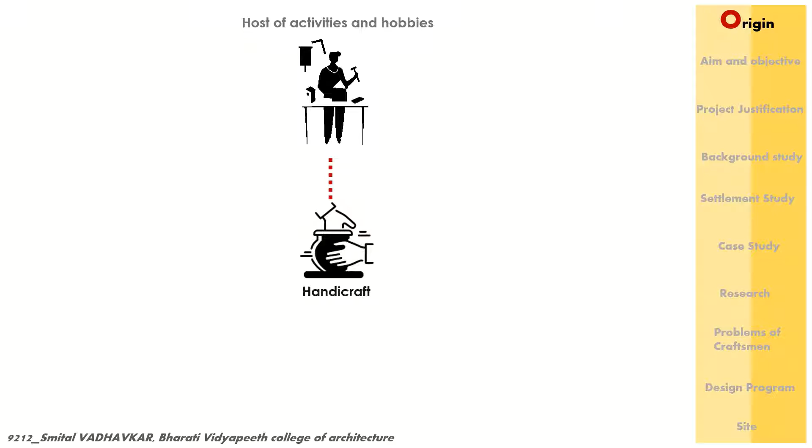The interest in this topic arose when I helped my senior in her project regarding craft. So what is craft? Craft is a host of activities and hobbies related to making objects and products with one's own hand skills. This could also be known as handicraft. It was seen that craftsmen enjoy the joy and excellence of their own work. This was also known as craft because a group of people or family had refined their skills professionally into it.

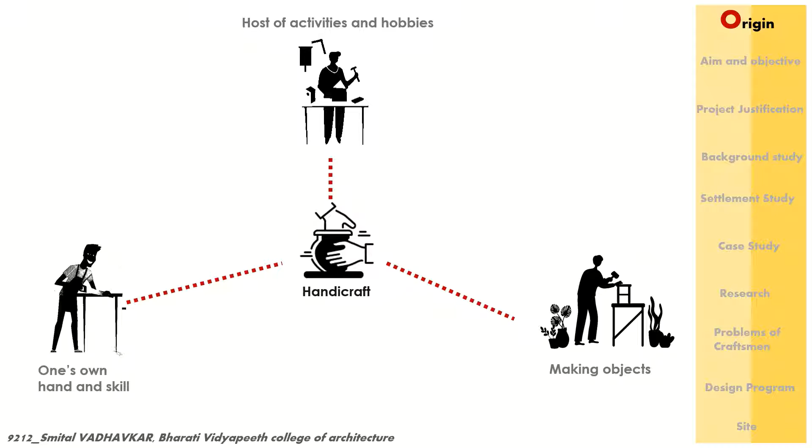So why did the craft decline? Did the Industrial Revolution and increase in machines reduce the role of professional craft gradually, as machines produced the same product in industries at a lower price? And now we commonly see this craft as a hobby.

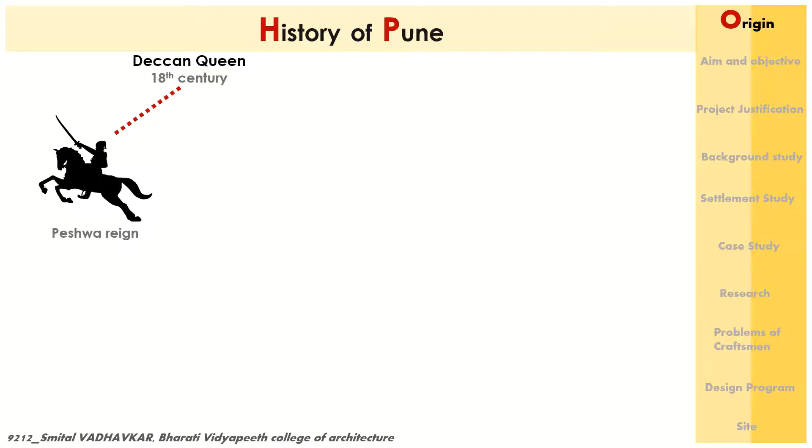This development was initiated in the center of the city, that is Kasba Peth. During the reign of Peshwa in 1730, they invited people from different parts of India who were professional and skillful to start their business and profession in the capital city, like Tambat, Kumbhar, and Burud. So these people worked together, lived together in the streets, which were known as Ali at that time.

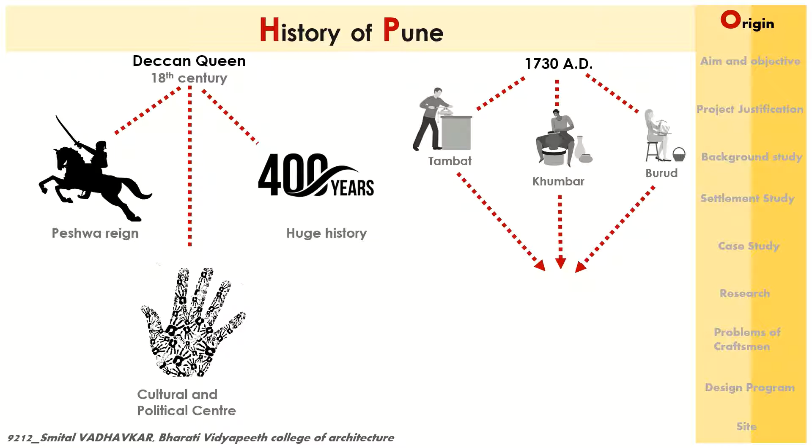So the Ali is a lane of the street in which people of the same profession work together as a community, like Kumbhar Ali, Tambat Ali, Burud Ali, Tambaku Ali, Bandhar Ali. The different Alis are Tambaku Ali, Stationary Ali, and Bandhar Ali.

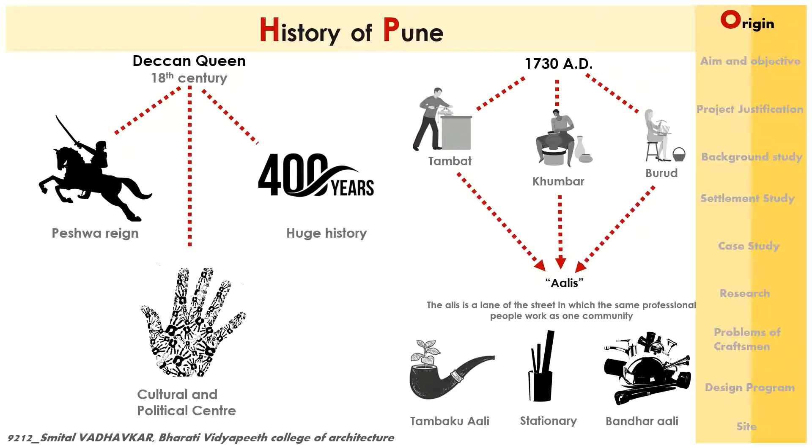The trade of these craftsmen was in great amount during that period, but with modern technology or modernization, few crafts could survive. Craftsmen like Tambat, Kumbhar, and Burud could barely survive.

The project focused on understanding how architecture can create a co-working space to resolve the problems of craftsmen of Pune city, and also to enhance its trade by producing more products using new methods and training local people.

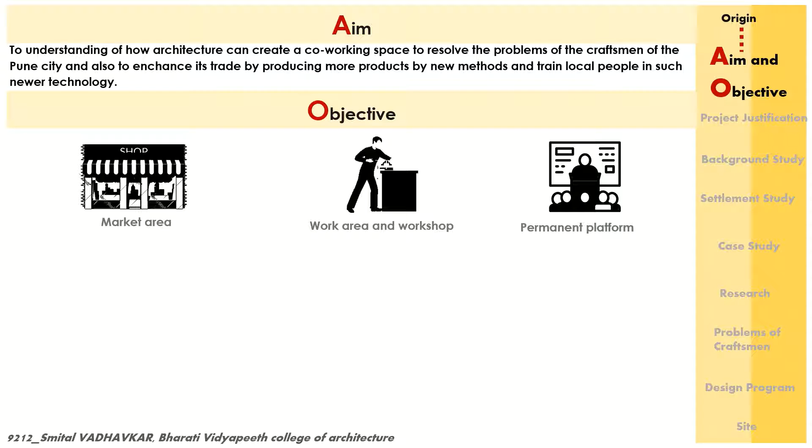The objective of the project is to have a market area which could promote tourism, to provide work area for the craftsmen, to organize workshops for craftsmen where they could live and learn new modern products which are in demand, a place where young craftsmen could learn. Introducing skills for the craftsmen in a sustainable manner could create a permanent platform for them, and also help promote these old craftsmen of Pune to various parts of India.

To produce, trade, and have a professional workshop would be the primary scope of the project, and these are the limitations. Why is this project necessary?

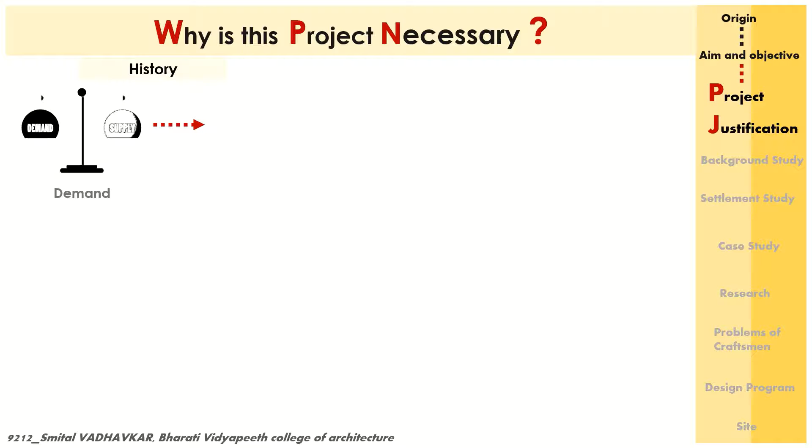As we see in history, the demand for this craftsmanship was more, but nowadays, due to modernization and urbanization, people neglect this old genuine product. Still, few families are dependent on this art. The NGO INTACH Pune always tries to make this art known to all.

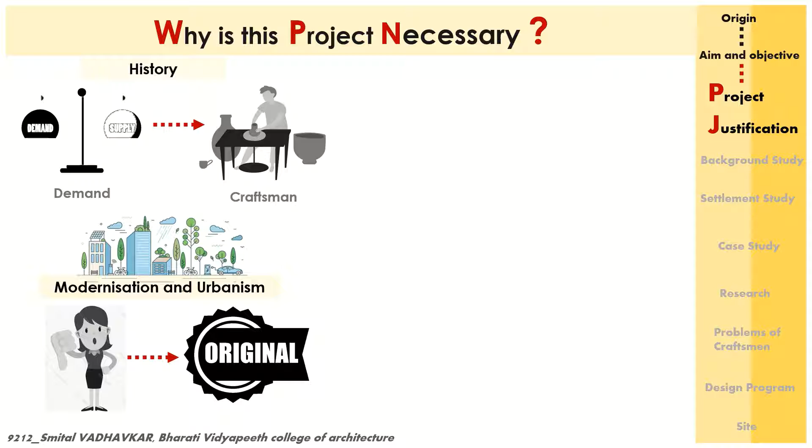The problem faced by the craftsman is the space problem, the problem for selling the products. Facilities such as toilet blocks are not provided. Few craftsmen do not have space to sell, so they sit along the roadside and sell the products.

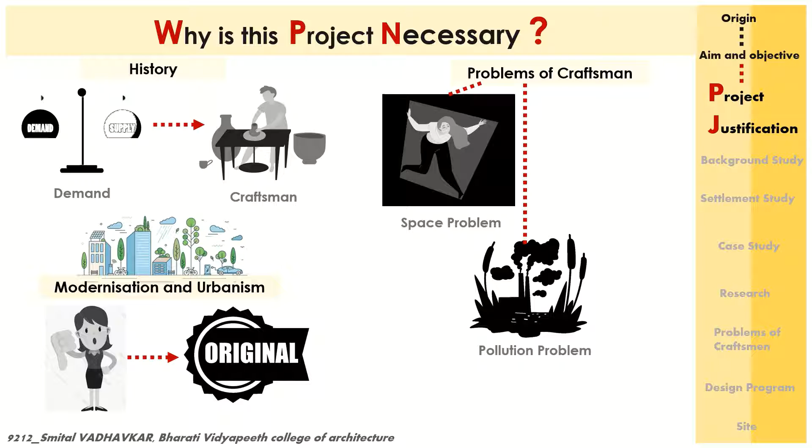The second problem is the pollution problem. The burning of kiln and the firing process in Tambat and Kumbhar creates a lot of pollution.

The third is a transportation problem. These craftsmen have been shifted from the center of the city to the outskirts, so they prepare their product in the outskirts and bring them back to the center. This causes a transportation problem and a traffic issue for them.

So there is a need to revitalize these craftsmen, allowing them to work in a mixed environment while making the product. Today the machine has a lot more importance, which cannot be denied. But it is also important to know that the revitalization of this craft is important too, without changing their method, which is traditional, skillful, and old.

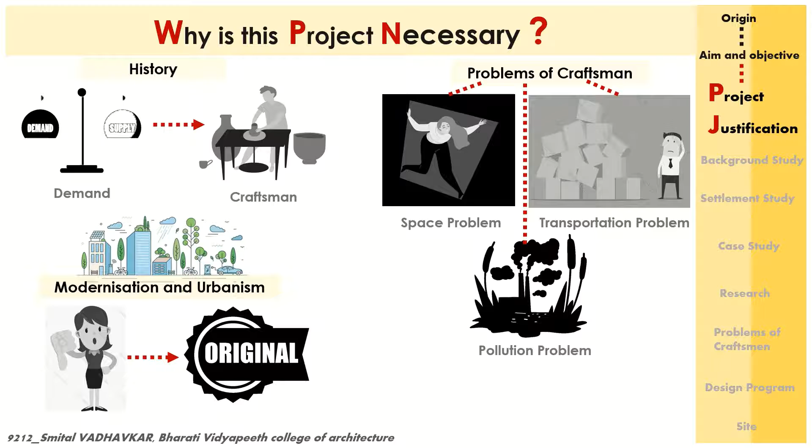But to utilize their potential to work and teach them new ways to make products, and recreate old products in a newer way which could be accepted by society. This could also help them increase their income and help the Indian economy. Mainly this will help preserve the craft which is the core of the city.

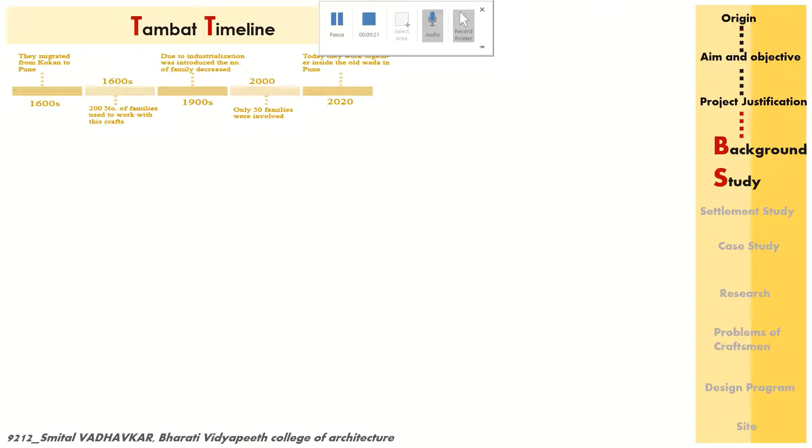So moving towards understanding the three crafts, the first one is Tambat. It is seen that these people were invited from Konkan to Pune in 1600, and now the number of families has reduced to 50 families, and they now work in Old Wada in Pune, or some people work individually. The process of Tambat Ali is seen in the images.

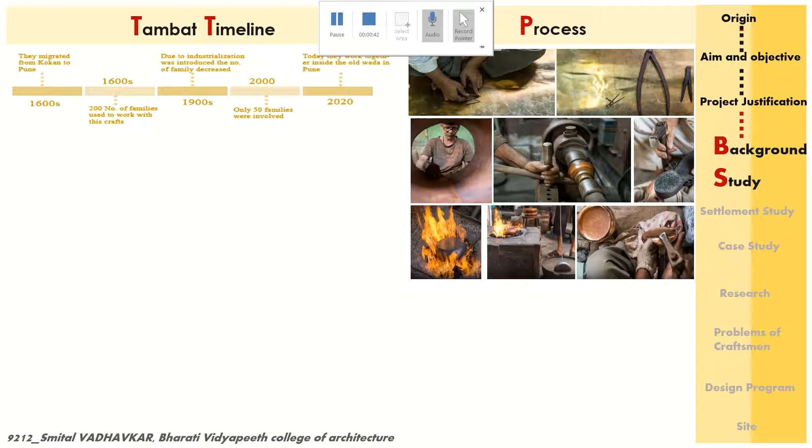So this is the copper sheet. They cut it along and join it. This is a machine used to make the shape of the product. Then comes the firing process, and at the end is the embossing and buffing process. These are a few final products of the Tambat craftsman.

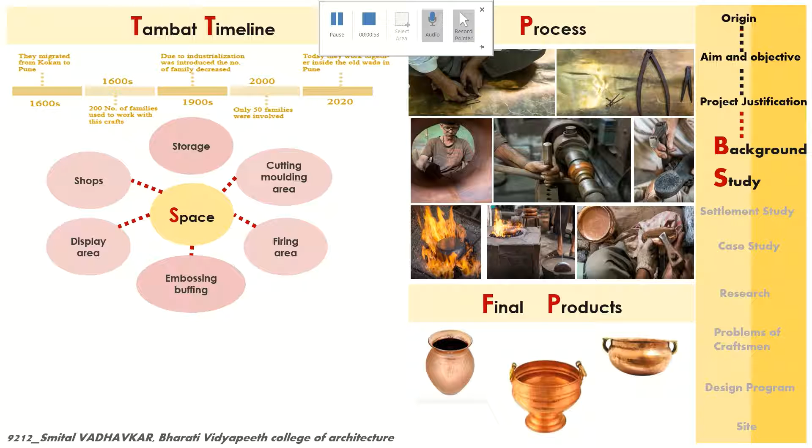After understanding the process, the spaces were listed down, which could be designed, and the area for it was designed as per the function and the area requirement for the person.

The next is the Kumbhar. They were called from Gujarat to Pune in 1800, and the number of families at that time were 200. Now they are almost 20 to 25 families, and they work in Mundwa, which is at the outskirts of Pune. The process of Kumbhar craft is seen in the images.

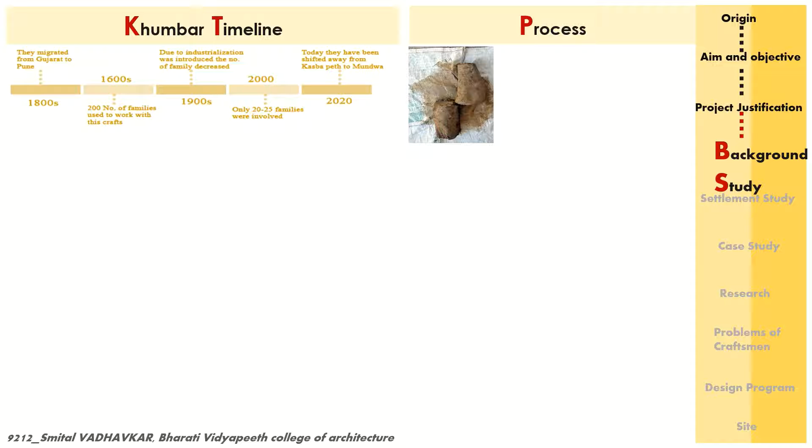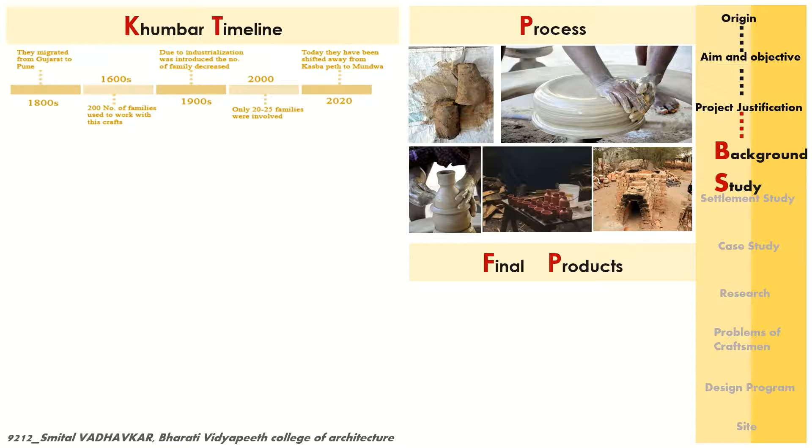The steps of making pottery involve soil preparation and wedging, then molding it on the potter wheels, drying it, putting it in the kiln, and then decorating it. These are a few final products of the Kumbhar craftsman.

After understanding the processes, the spaces were listed down which could be used to design, and the area for it was designed as per the function and the requirement of the person.

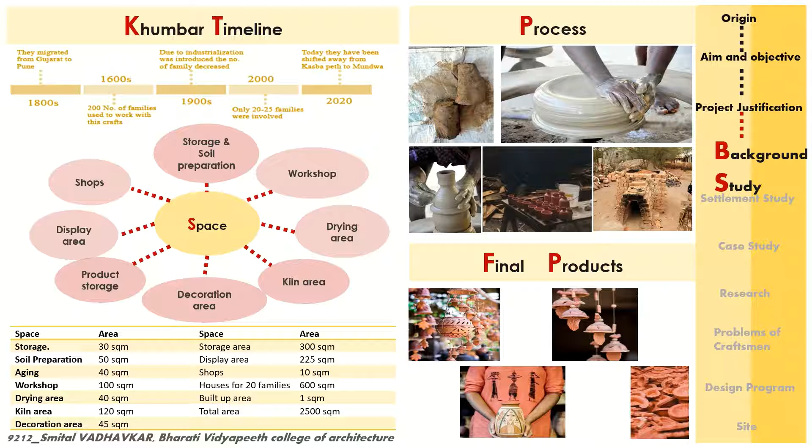The last is the Burud Ali. They were called from Junnar to Pune in the 1800s. Now there are almost 15 to 20 families working in the Ganesh Peth. The process is shown in the images.

These are a few final products of Burud craftsmen. After understanding the processes, the spaces were listed down which could be designed, and the area for it was designed as per the function and area requirement.

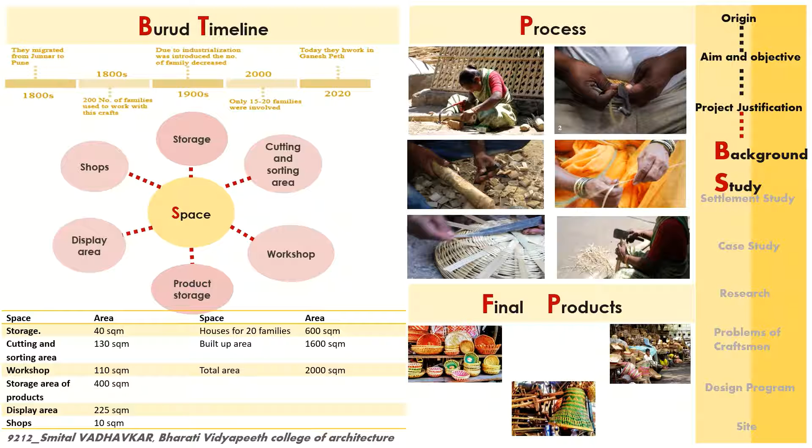Next comes the settlement study. Four settlements were studied. The first one is Indonesia pottery, the Klipoh village in Indonesia, and the learning outcome was that the village has good interaction between craftsmen, tourists, and traders. It was observed that the spaces used could serve as a common space for the pottery, for example, the kiln is common for 6-7 families. This could reduce pollution also.

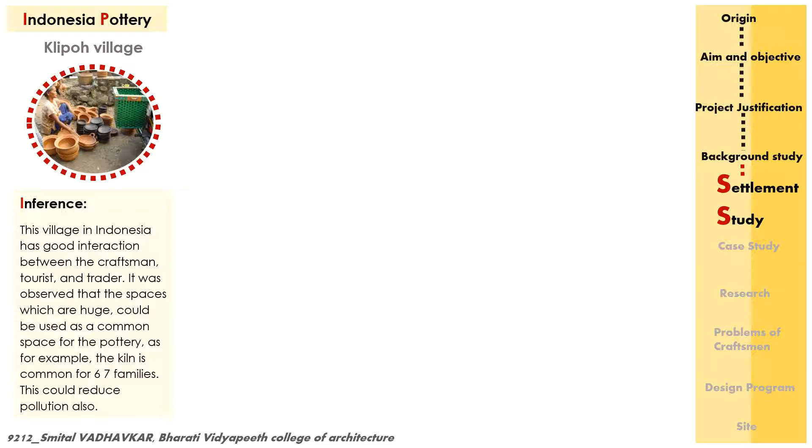The second one is the Dharavi pottery, which is very famous in Mumbai. Here the spaces were small, and this caused many problems, as the kiln was just behind the houses, which caused breathing problems for the people residing there. No proper space was given for workshop and living.

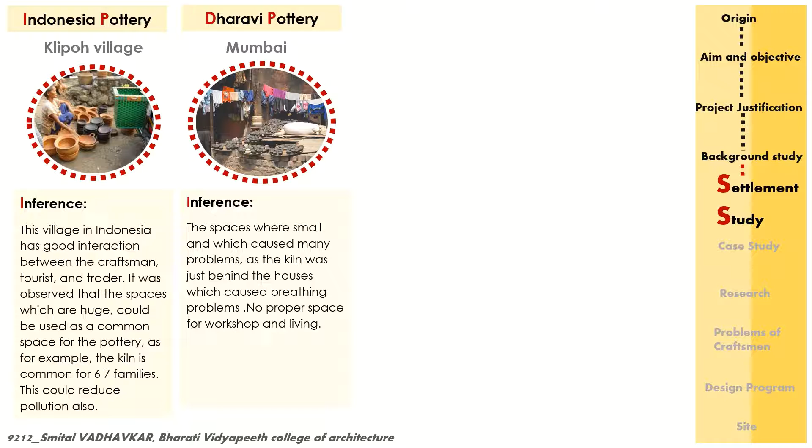The third one is the Tambat Ali of Pune, which shows that people work in groups as well as individually. They have workshops in front of their houses and also in the Vada. The condition of working is not so good. During the rainy season, it is difficult for them to work, and they don't have proper space as per their work.

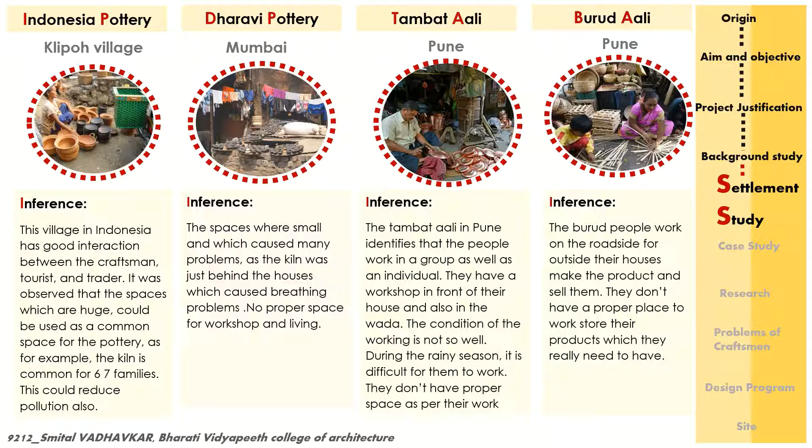The fourth one is the Burud Ali in Pune, where people work on the roadside outside their houses, make their products and sell them. They don't have proper spaces to work or store their products, which they really need to have.

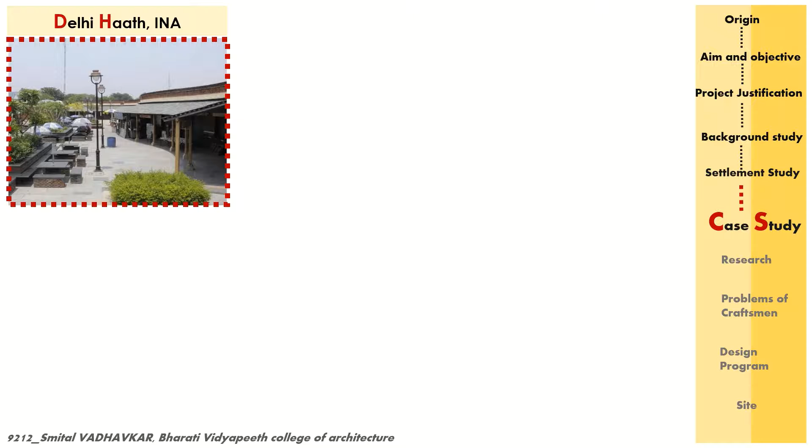The case study Delhi Haat INA is situated in INA, Delhi, and is designed by Pradeep Sachdev, in which the architect has used different materials to distinguish different paths for the walkways, shopping lanes, and pathways.

There is also a colonnade veranda created which is used by tourists to look into the shops and choose the product or overview it. The design flow is such that it maintains the admin at the entrance to control the tourists, and then the shops, as people could walk the whole side, so the cafe is placed at the end.

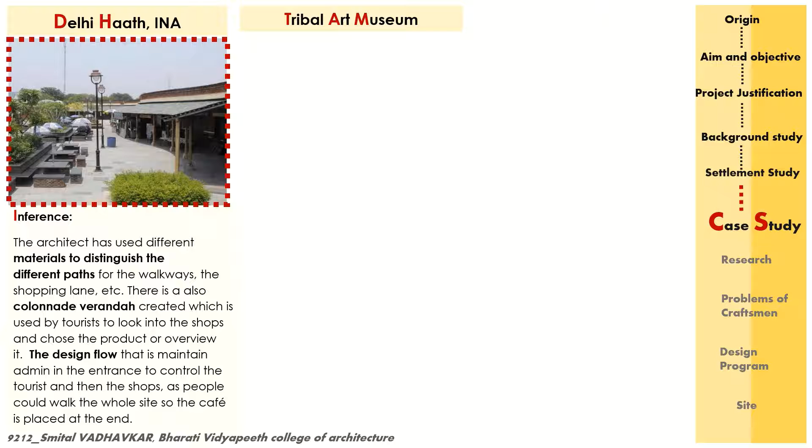The second is a Tribal Art Museum situated in Bhopal, designed by architect Revathi Kamath. It is a very good experiential structure which makes you understand the life of tribal people through the spaces. The concept of geometry is well seen in the plan. The architect used local material to express the tribal living of the artisans. Through the structure, it is seen that it is beautifully designed in a vernacular way.

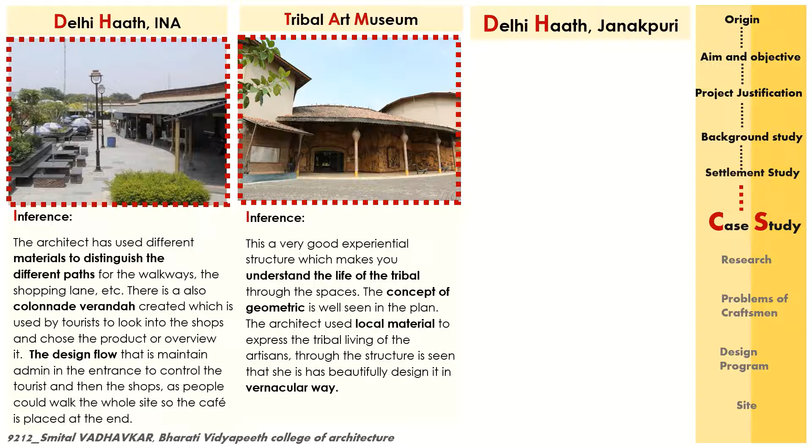The third one is Delhi Haat Janakpuri, situated in Janakpuri, Delhi, designed by the Archohm firm. Here the architect has beautifully used local materials in a contemporary way. The pathways are so gracefully designed that the user won't get interrupted.

The use of light is seen in some areas through the slab. A number of ramps were provided to go to the different levels. Proper design of green space was done wherever required.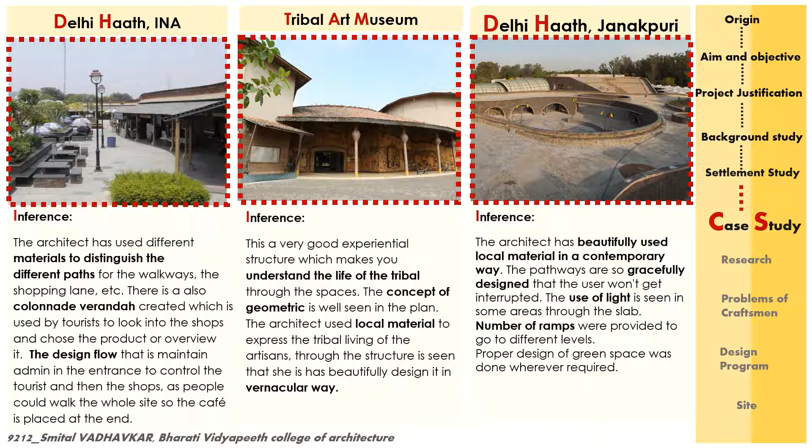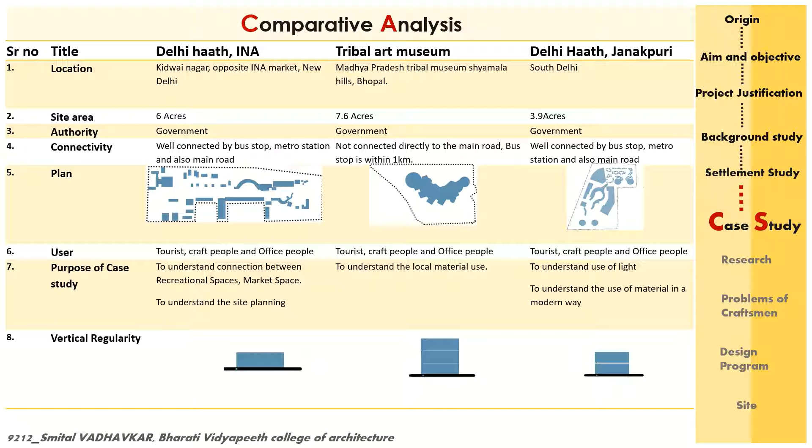Comparative analysis. In this, the points which were understood were location, site area, authority, connectivity, plan, user, purpose of case study, vertical regularity, types of spaces, planning, construction materials, and inferences.

The research focused on understanding construction material, with bamboo and mud, and how to apply it in design and how it could help the environment.

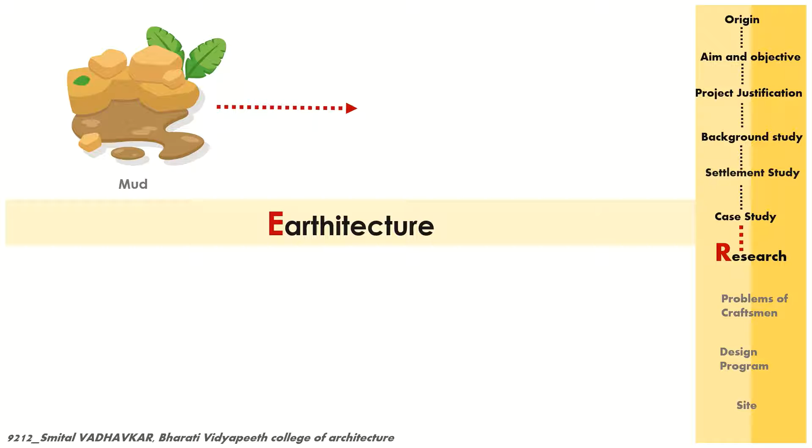The objective is to understand mud as a brick, as rammed earth, mud with straw bale, compressed earth blocks, and wattle and daub. And for bamboo, it is understood as bamboo reinforced concrete, roofing material, and walling system.

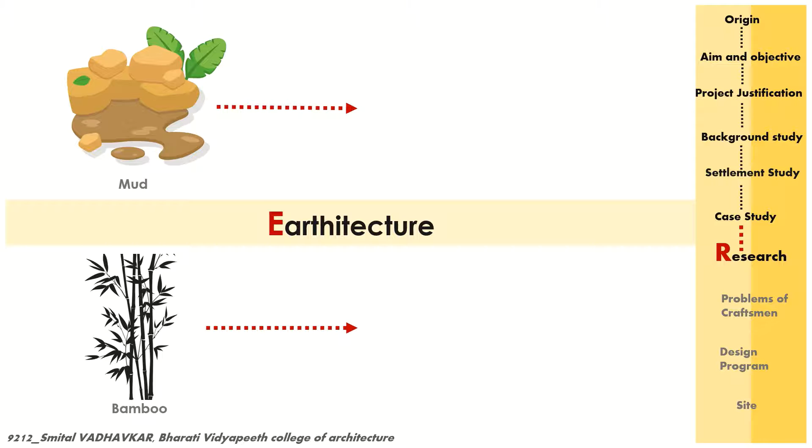As we see, the mud could be used and reused again once it is scrap of the brick, it could then go back to earth.

And these are a few advantages of bamboo. It has high tensile strength, fire resistance, good elasticity, the weight of the bamboo is less, and it is cost effective.

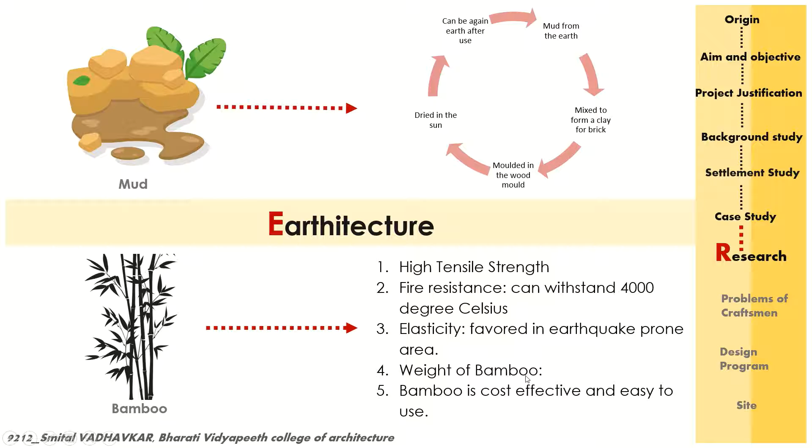Understanding mud as a material. The first type is mud as sun-dried bricks. In the first image, it is seen that the mortar is the same mix as the brick, but in a muddy state. The size of the brick is determined by molds used, which are made of wood or metal.

The second type is rammed earth. This shows the steps of how rammed earth construction is done.

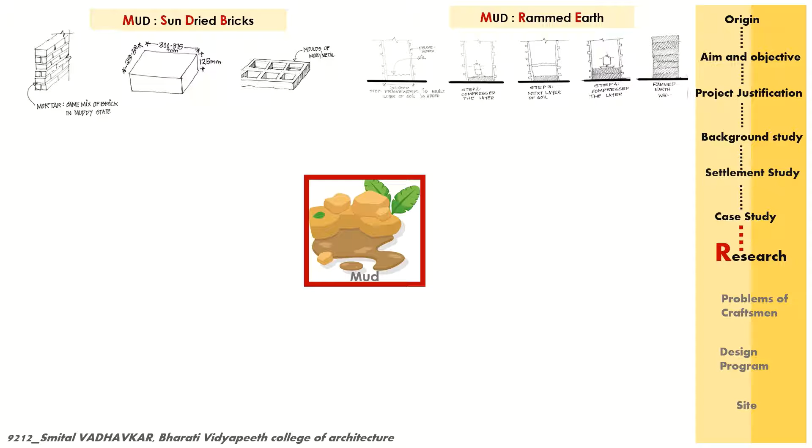The third type is mud with straw bale. The straw bale is the tubular stalk of grass such as wheat or rice, which has high tensile strength. Hay is different from the straw used here. Rice grass is significant in silica content, is dense, and can resist decomposition.

The fourth type is mud as wattle and daub. It has a framing of bamboo, and then the mud is plastered over it.

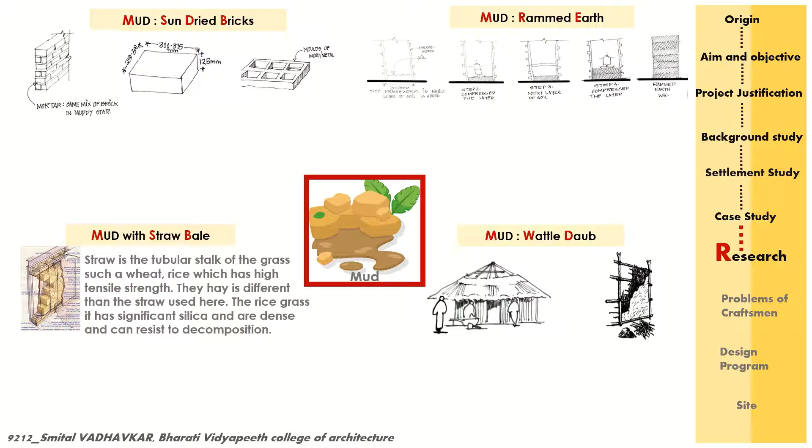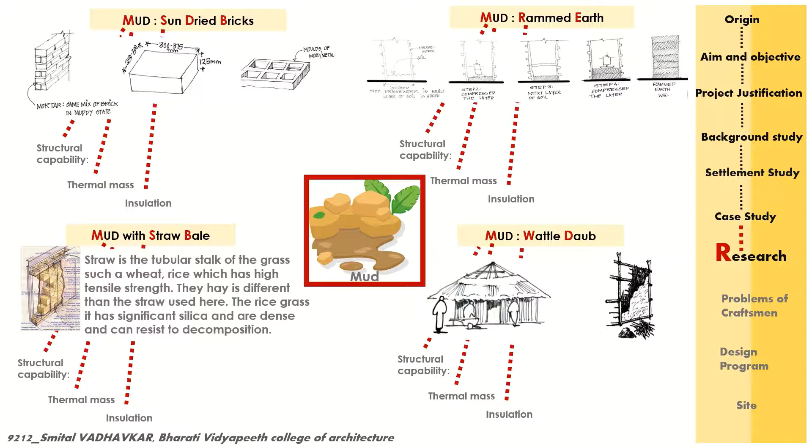After this, the study of all properties such as structural capability, thermal mass, insulation, fire resistance, durability, environmental impact, and embodied energy of all the materials has been studied.

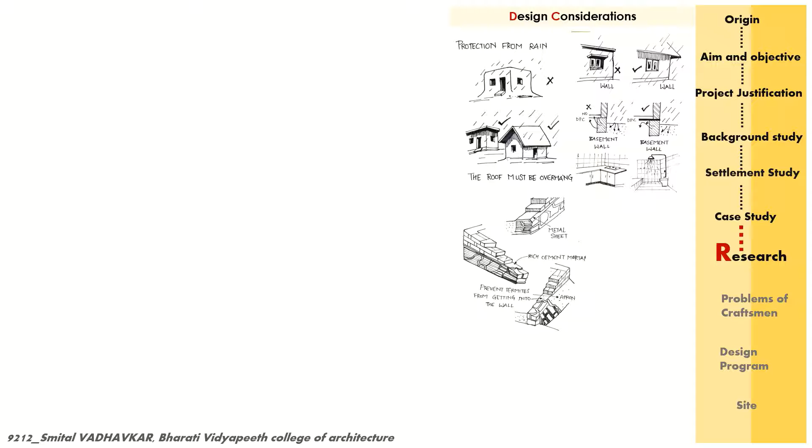After understanding the material, these are the design considerations taken care of: there must be overhangs, the exterior walls should not come in direct contact with rain, and the foundation should be protected from rain.

The table explains the characteristics studied and how the design could respond to the climate. The pointers studied were wall thickness, structural system, structural capability, thermal mass, insulation, fire resistance, embodied energy, and the suitable climate for construction.

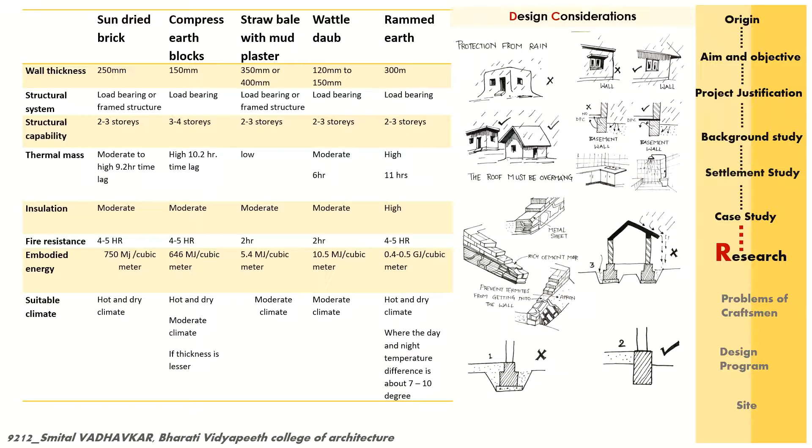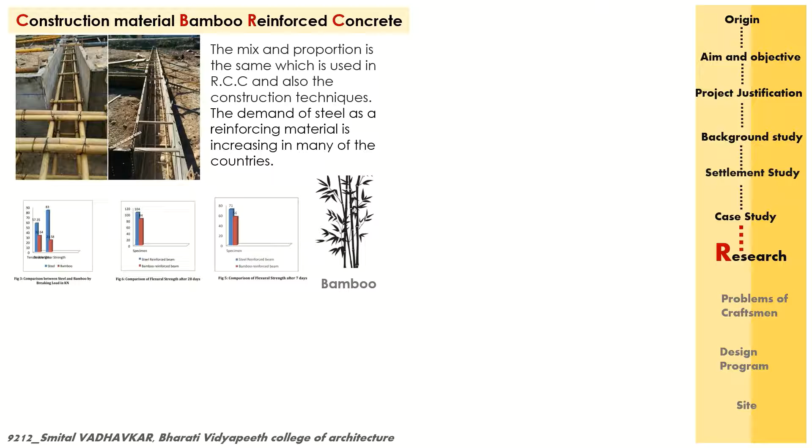The second material is bamboo, used as reinforcement in concrete. The mix and proportion are the same as used in RCC, and the construction techniques are also the same. After understanding the properties of bamboo, it is seen that bamboo reinforced concrete deflects due to low density, but the flexural strength is almost the same as steel reinforced concrete. Hence, it would be used where the load is less.

Using bamboo reinforced concrete would also reduce the cost and the environmental effect. There are a few walling systems using bamboo: the woven bamboo wall, whole bamboo wall, vertical halved culms, and the wattle and daub method.

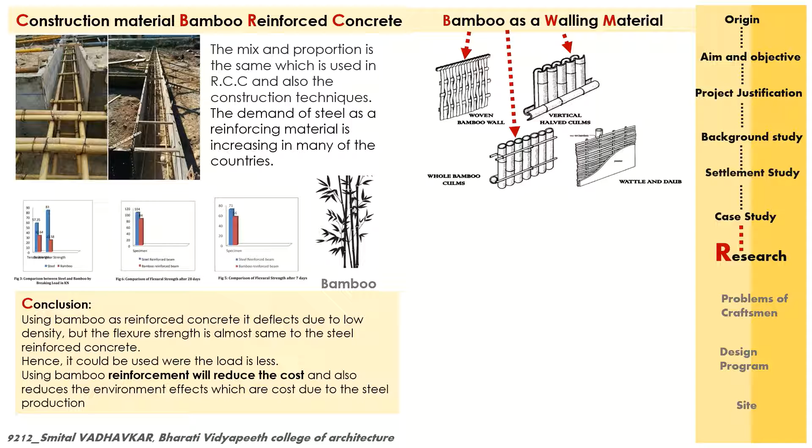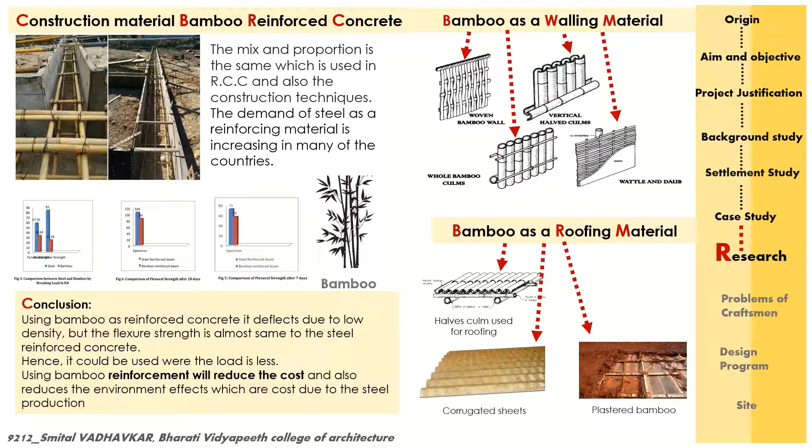Next is the roofing system using bamboo as a material. The first is halved culms used for roofing, corrugated sheets used for roofing, plastered bamboo, and the last one is a mat of bamboo for roofing.

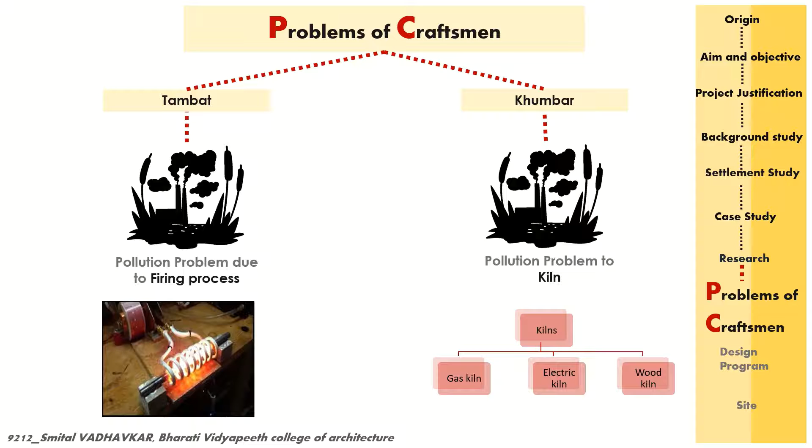Next, the research focuses on understanding the problems faced by craftsmen in their processes and introducing new technology. The main problem of the Tambat community is the firing process, which causes pollution. A copper coil for heating the vessels could be used instead, reducing pollution and replacing the firing process. The problem faced by the Khumbar is the kiln, which causes pollution, and it could be replaced by a gas or electrical kiln, which also saves time and reduces pollution.

Design program: the project will not only promote the craftsmen but also connect tourists with craftsmen. The tourist would experience the craft by living in the village. The project will consist of three main parts.

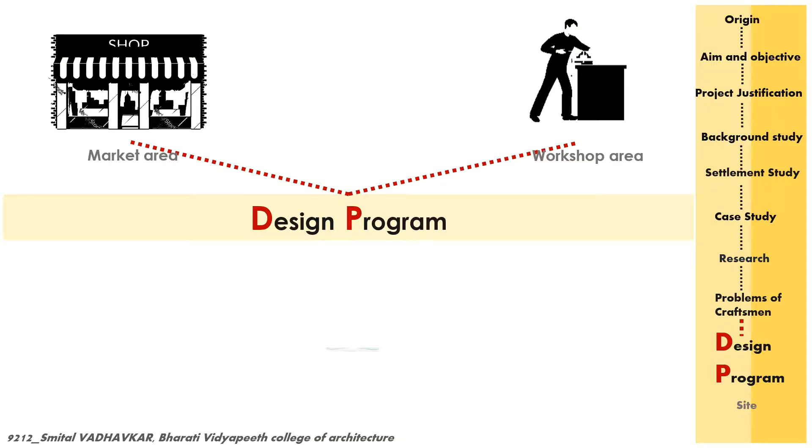The first part is the market area, the second is a workshop for craftsmen, and the third is tourist-attracting spaces such as cafes, green spaces, and shops. This is the area program developed after the case study and understanding of the craft.

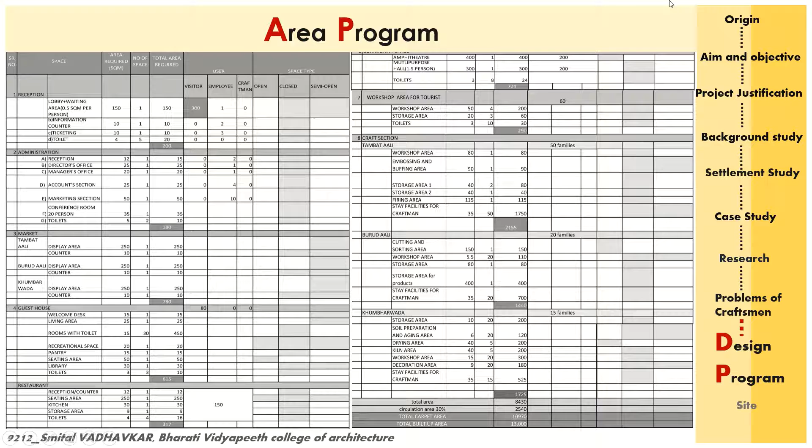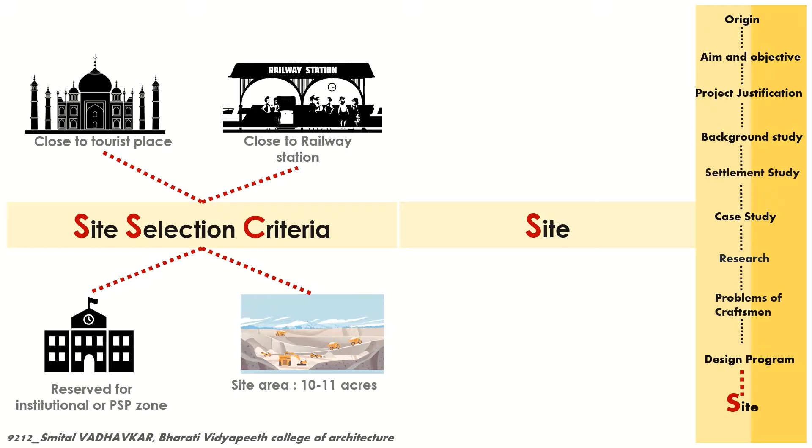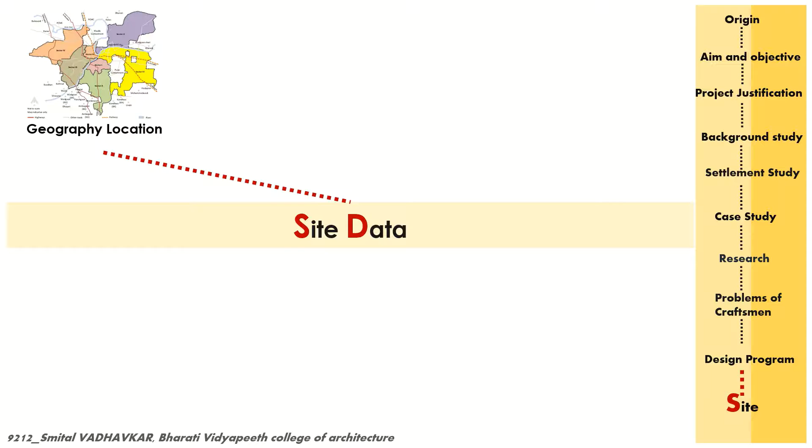The site data: the neighboring districts of Pune are Raigad, Satara, Solapur, Thane, and Ahmednagar. It is situated in the Deccan Plateau, 560 meters above sea level. The Mula Mutha is a major drain, and the city has underground sewer lines.

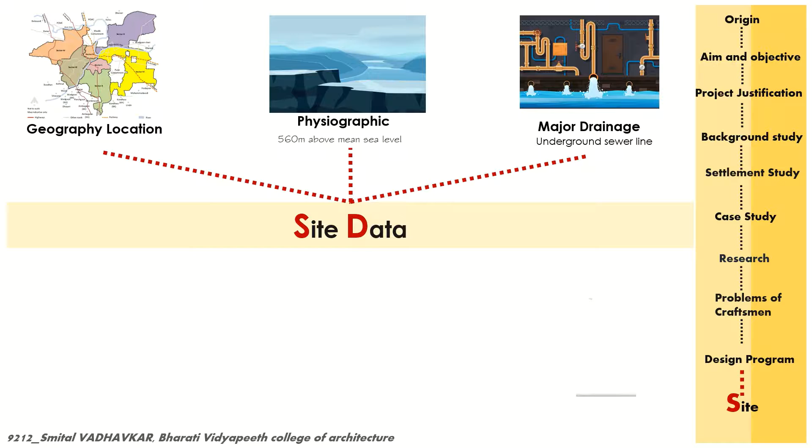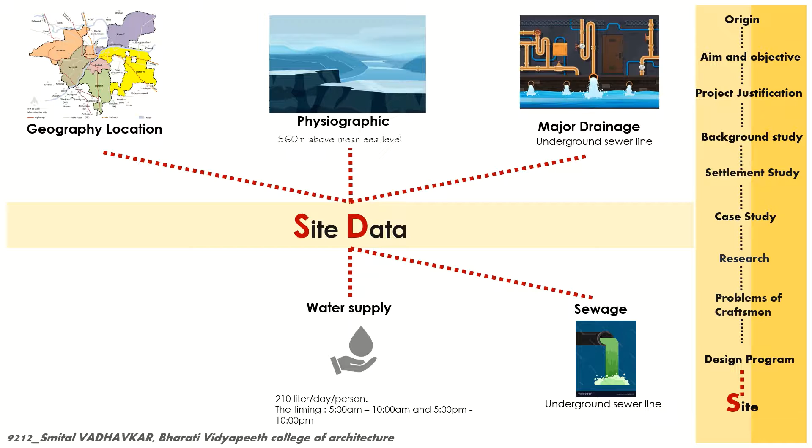The water supply is 210 liters per day per person, with timing from 5 a.m. to 10 a.m. and 5 p.m. to 10 p.m. The soil type is deep and medium black soil.

Connectivity: the site is along the secondary road, 6 kilometers away from Pune station and bus stop, and 1 kilometer away from Khadki railway station. As seen in the DP, the brown marking is the proposed transportation hub, and the arrow marks the STP, which is in close proximity to the site.

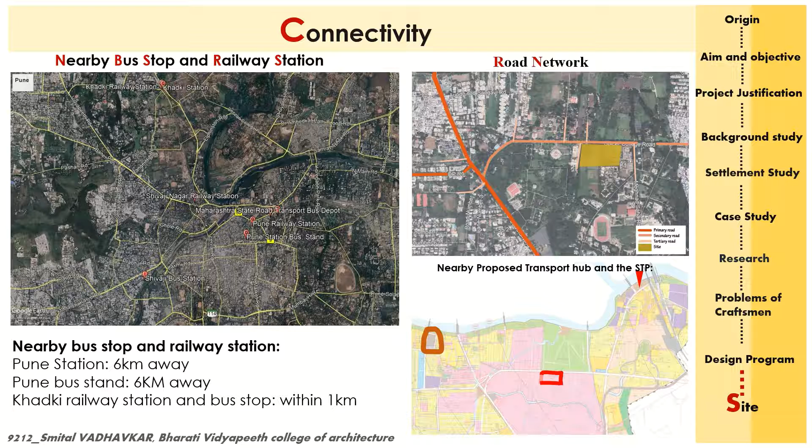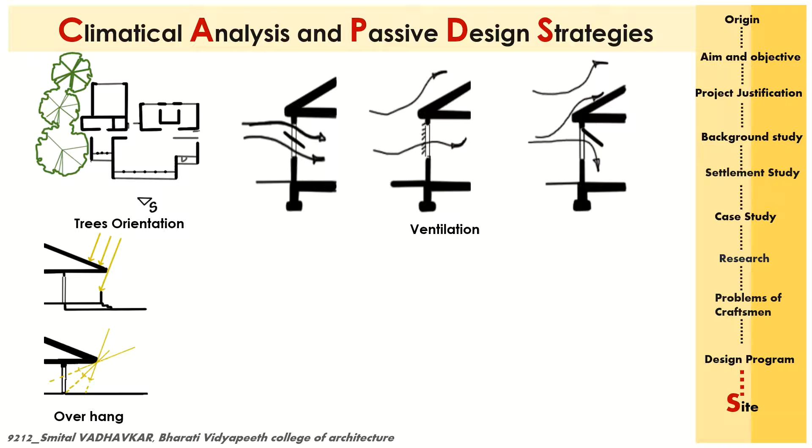Climatic analysis and passive design strategies: trees should be located along the west side of the site. Ventilation could be stack or cross ventilation. There would be overhangs above windows so that summer sun rays cannot enter the space, while in winter the sun rays do enter the space.

During summer daytime, evaporative cooling and ventilation can bring comfort during nighttime. In monsoon, ventilation is necessary for comfort level. In winter months, the comfort is natural.

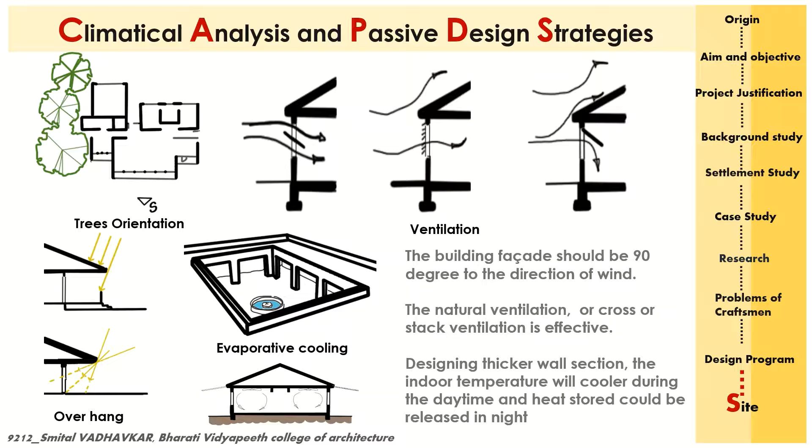The building facade should be at 90 degrees to the direction of the wind, and the wall thickness should be more so that it could maintain the temperature of the room.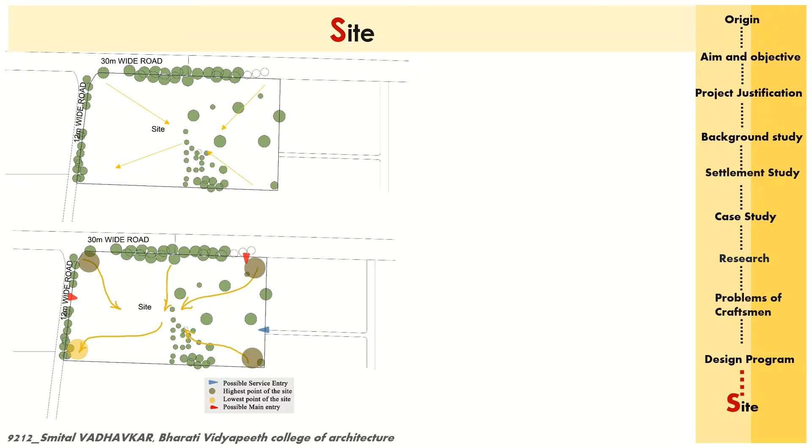After understanding the sections of the site, this shows the slope of the site, through which we can understand the highest and lowest points. The red marks could be the entries, the different entries of the site, and the blue one could be the service entry. As per the highest and lowest points, the services could be designed for the site.

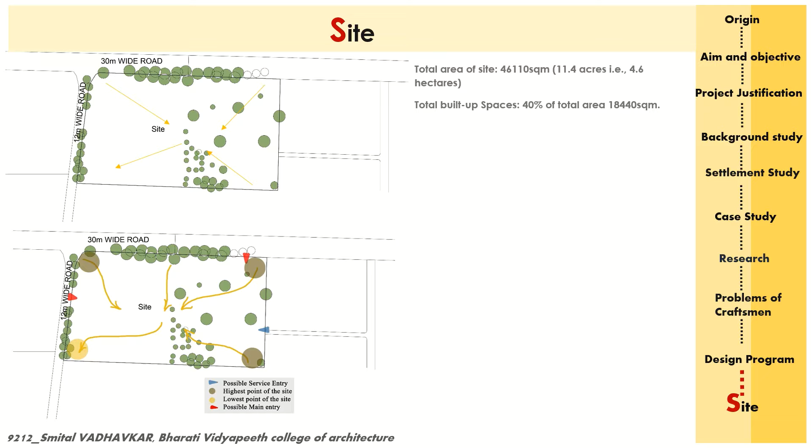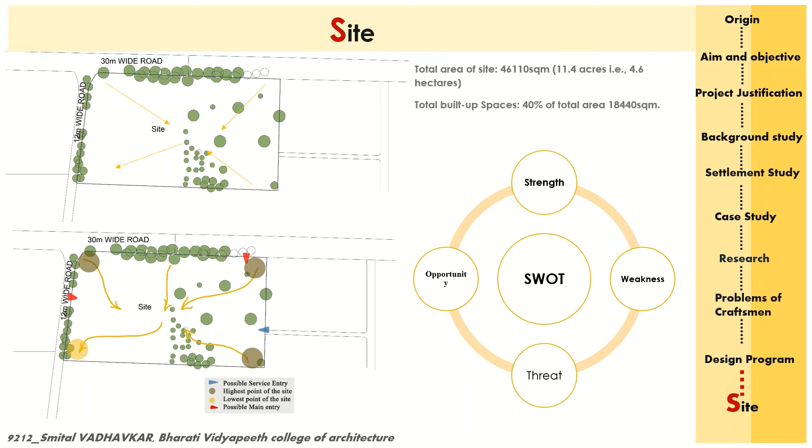The site area is 4.6 hectares, and the total built-up should be 40% of the site. After understanding the SWOT analysis, it is seen that the site is well connected by the bus stop and the station. Thank you.